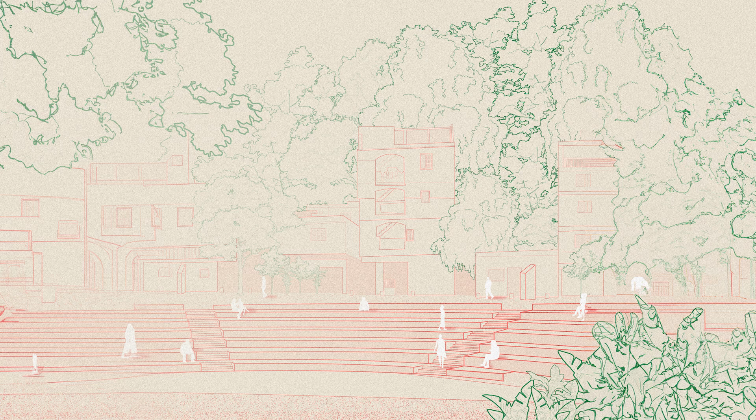Emerging Practice highlights rising Caribbean design practices with distinct methodologies. Their practices produce accomplished bodies of work rooted in designing in Caribbean contexts, culturally, materially, economically, and politically. This year, we are exploring what it means to expand design practice. We are particularly interested in designers' work within the Caribbean that engages Caribbean cultural forms and material realities, while also responding to modern production systems.

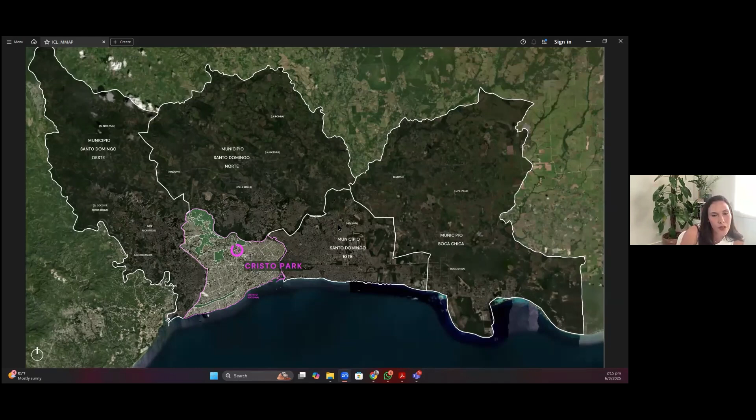It is located in Santo Domingo, Distrito Nacional, the national district of the capital city of the Dominican Republic.

Here are some maps that showcase the little percentage we have of green spaces in the metropolitan area. Cristo Park is part of the infrastructure that was created in the 70s, early 70s, but it didn't have a particular use, so it was like a residual space.

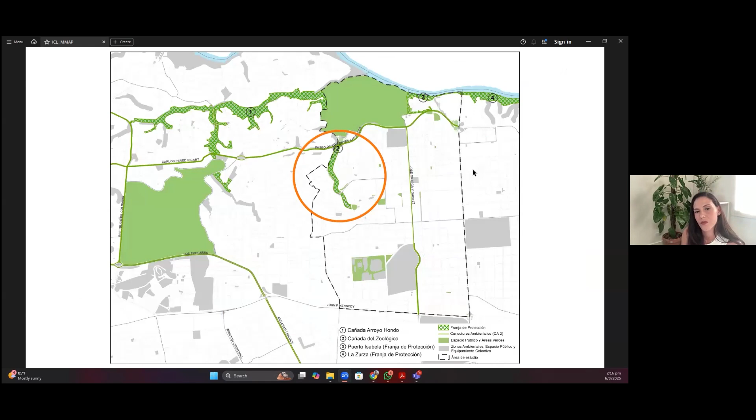It's a project that is 1.2 kilometers in length, and it has about 40 meters of section.

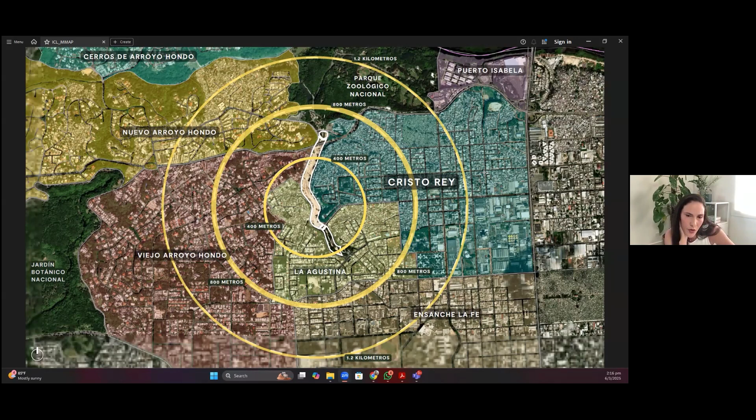These are all the neighborhoods and communities that were going to be affected directly by the construction and design of this space. We first analyzed the existing landscape, trying to understand the existing conditions and situation, not only about the infrastructure, but also about the people and all of the problems they had with health and the conditions of the sidewalks and everything.

So it was going to be a great opportunity for these people to have a space that function.

We tried to understand the morphology and topography, which was the main element we analyzed with site surveys, because of the different slopes and the overflow, understanding how it worked to use it effectively.

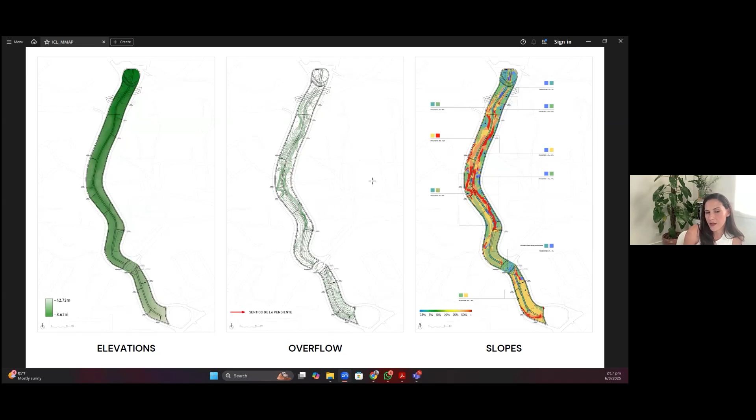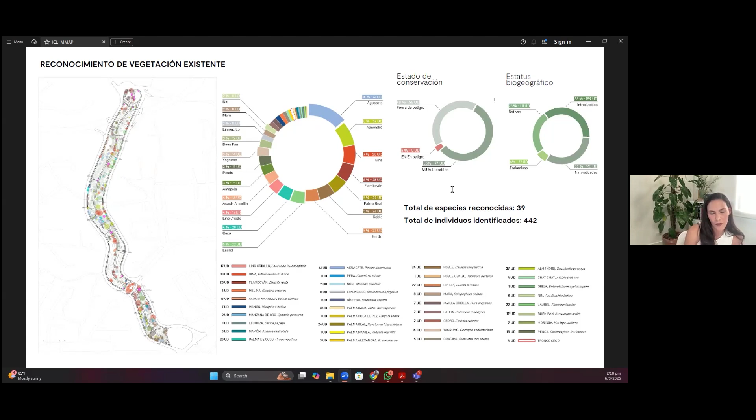Another interesting thing, we had to recognize and identify all the different tree species we found, and the results that we had. The fewer species were native, so most of them were frutals and exotic species, and they were going to remove most of them because of the construction itself.

We tried to map and understand the situation of land use and made these different analyses.

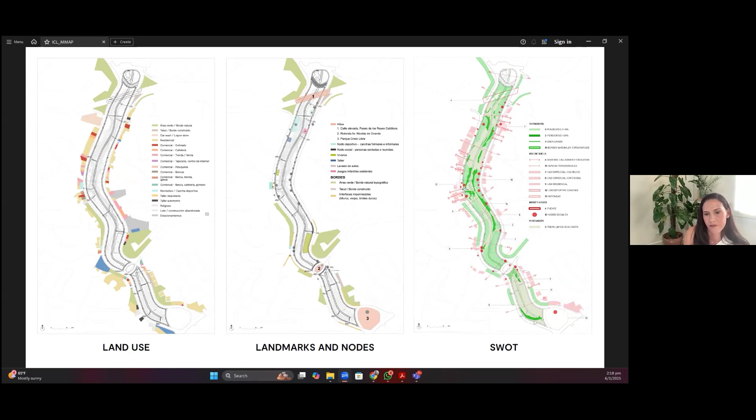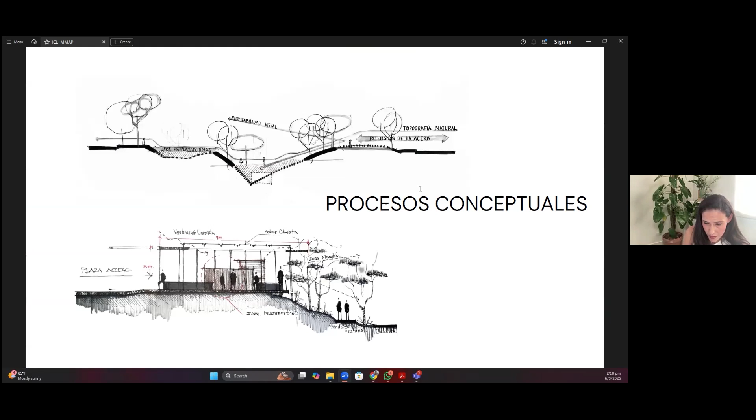Then the process of the design with our initial conceptual steps.

These diagrams explain conceptually what we try to do with different circulations that we're going to improve, not only pedestrian, but also bike lanes and different accessibility that the park will have, with different points and platforms that will be used as plazas and the extension of the sidewalks.

These were the existing sections with different forms of strategies that were going to be implemented in the design.

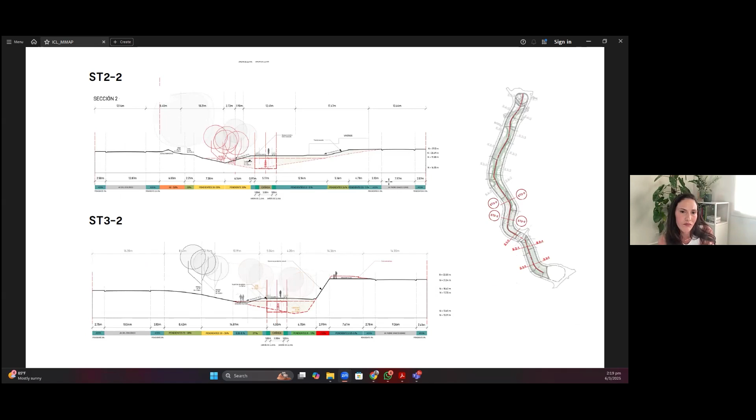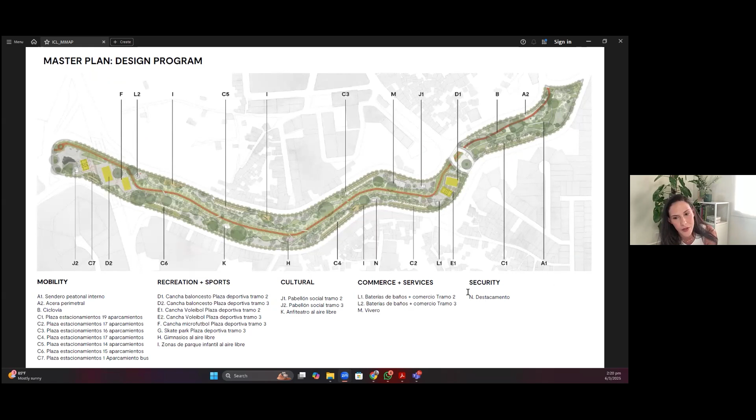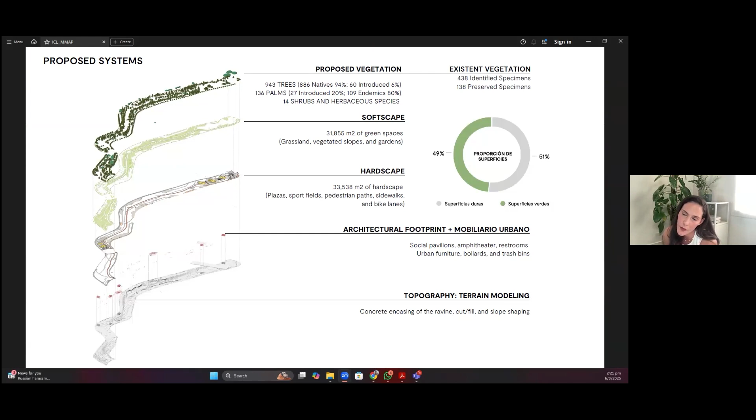Here are the different systems we needed to think about that were previously explained in the master plan. We did go to the detailed design of the different urban furniture we have.

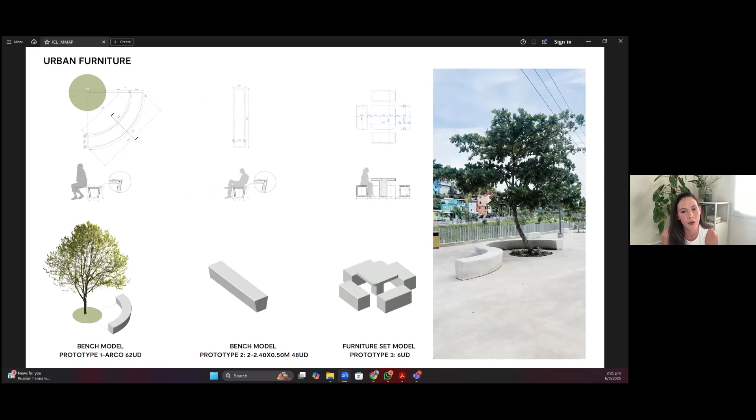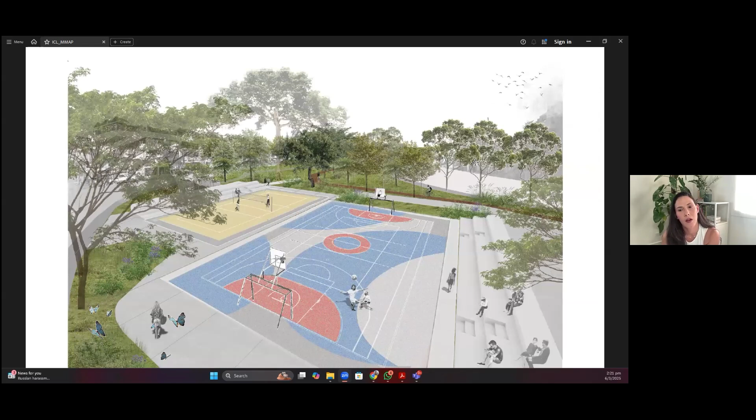Some pictures of the initial perspectives of the design. Amphitheater, we also had to implement different plazas with services and restrooms.

Here a showcase of different parts of the process of execution, from 2022, from 2023, and even last year.

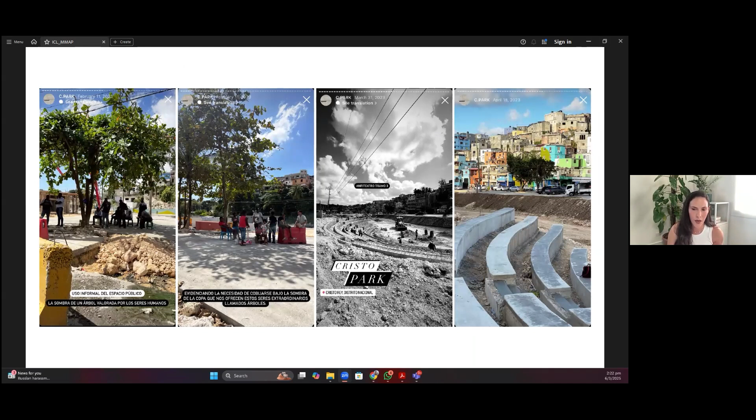The painting process, how we could work in collaboration with different design teams for the art, painting, and graphic design of the project.

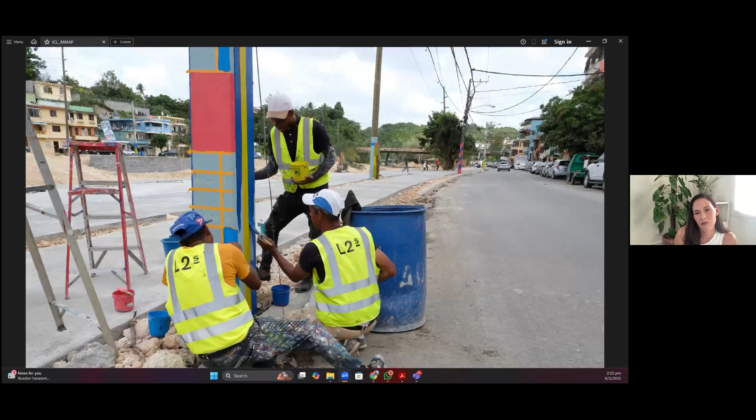The program and the signs of the project were made using this mosaic technique.

Here's how they were implemented all over the place, the different pedestrian paths with slopes, because we have different levels in the proposed topography. We tried to preserve the existing topography as much as we could.